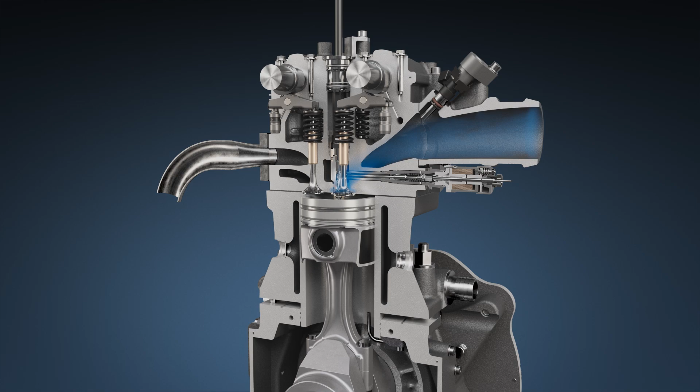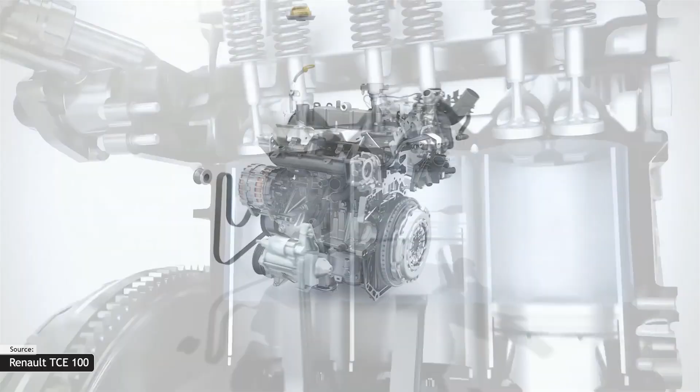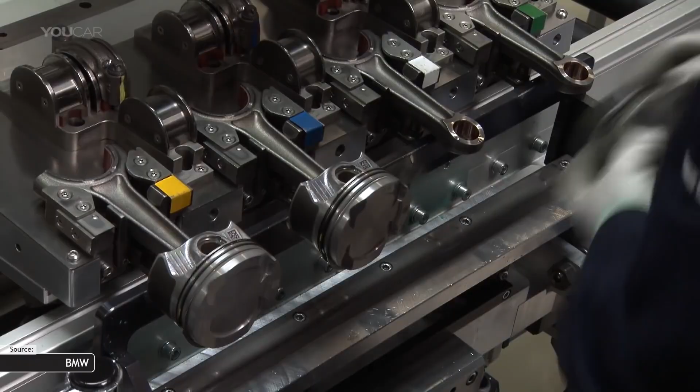In 2024, 87% of new cars sold in the world still had an internal combustion engine. Combustion engines are highly profitable to the automobile industry. They are affordable and low constraining to end users. Their production does not need critical materials.

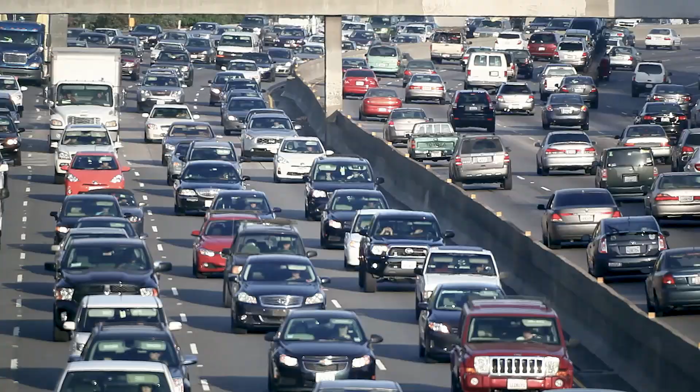As global warming demands solutions that are applicable at a global level, fuel-efficient combustion engines have a major role to play in the future. Not only will they reduce oil consumption on a large scale, they will also make synthetic fuels more competitive.

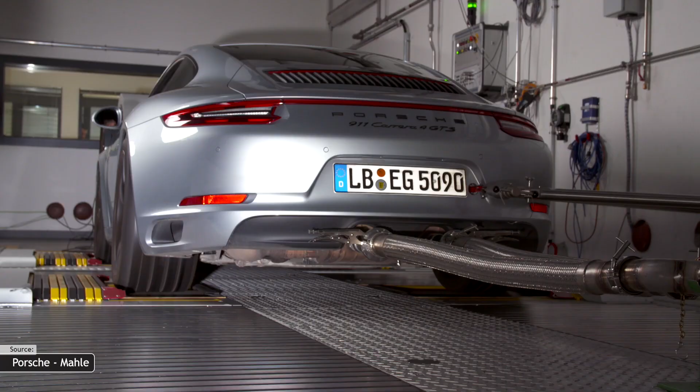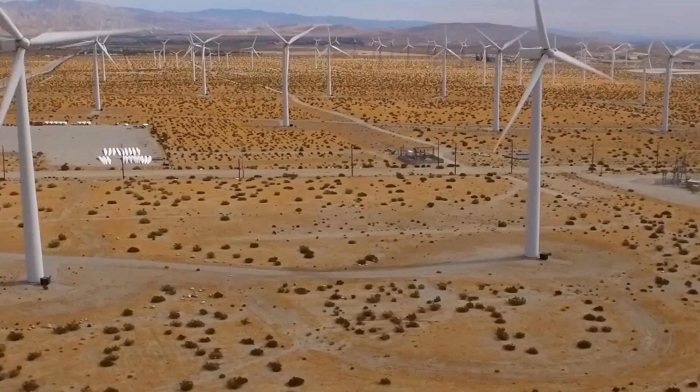Synthetic fuels can be combined with atmospheric carbon capture to create carbon-neutral, stable and long-life storage for intermittent renewable energy. They also have the benefit that they can be produced in regions where wind and sun are abundant.

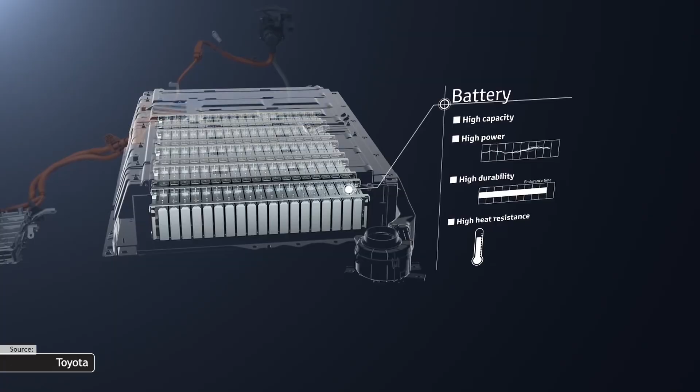Synthetic fuels and green electricity are both intended to power future plug-in hybrid cars. This carbon-neutral strategy will meet all customers' needs with limited constraints, minimum new charging infrastructures, and low dependence on critical raw materials. Combined with batteries, synthetic fuels could be used alongside fossil fuels and then completely replace oil by 2050.

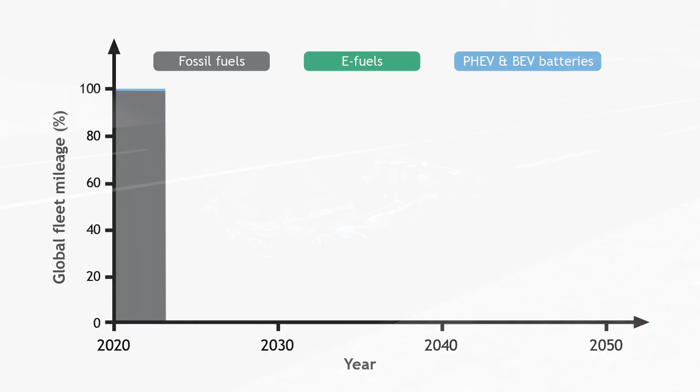This strategy could make passenger cars carbon neutral in just 2 or 3 decades while properly managing the economic, strategic, and social consequences of the energy transition.

In this context, turbulent jet ignition could play a major role. Turbulent jet ignition, also known as TJI, can significantly improve the fuel efficiency of combustion engines at a very affordable cost.

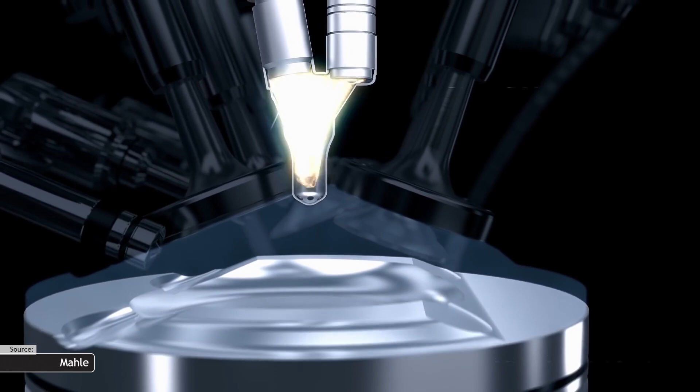Numerous R&D projects have demonstrated that TJI can potentially reduce the fuel consumption of gasoline passenger cars by 15 to 25%. Such an improvement would be a big step forward.

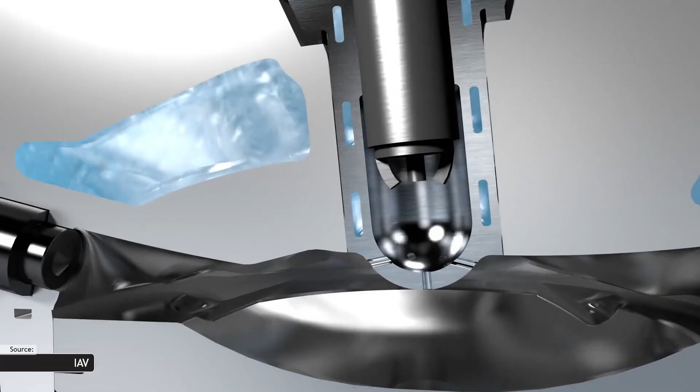Reducing the fuel consumption of all new petrol cars sold in France by 20% would reduce CO2 emissions by as much as if 28% of new cars sold were fully electric. In Germany, this would be equivalent to selling 55% electric cars.

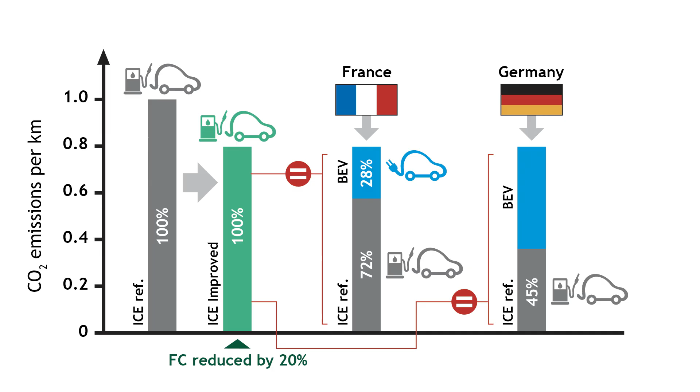However, up to now, turbulent jet ignition has been applied only to big-bore natural gas engines operating steady-state and to Formula One. TJI provides these applications with a brake thermal efficiency of more than 50%. Why not apply the same strategy to passenger cars?

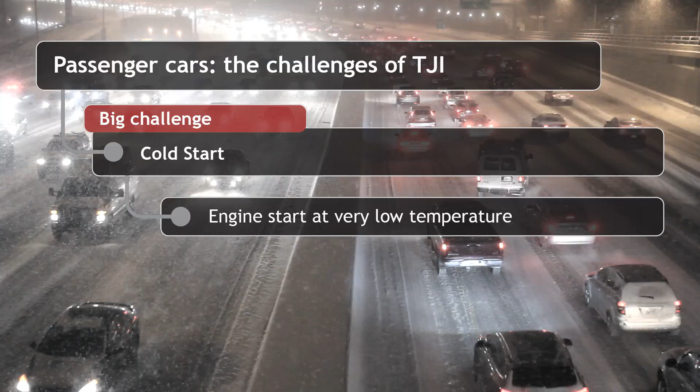Because existing TJI systems do not provide all the features needed for this application. For instance, turbulent jet ignition makes it difficult to guarantee a quick start at very low temperatures, a rapid warm-up of the engine, and a quick catalyst light-off.

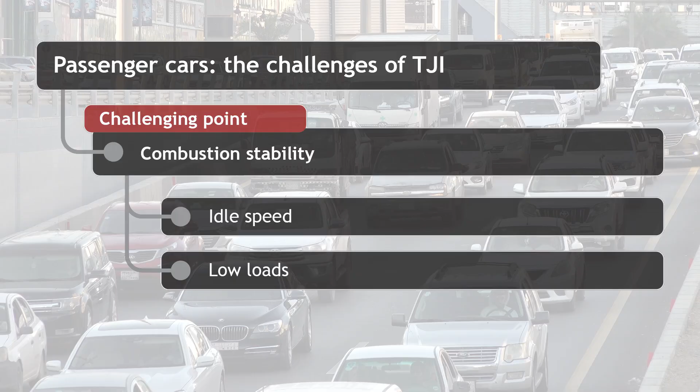TJI also poses problems of combustion stability at idle speed and low loads, and emits excessive noise and vibrations over a large engine operating range.

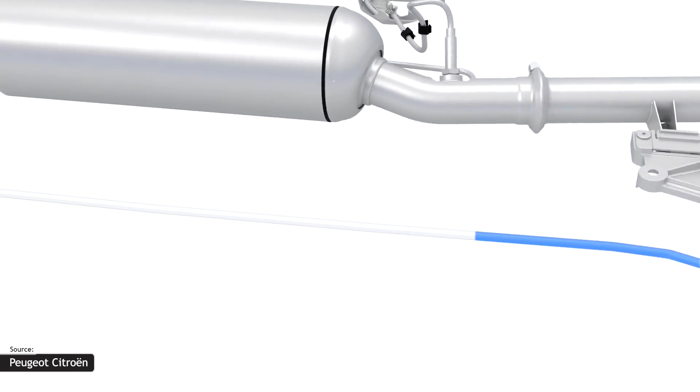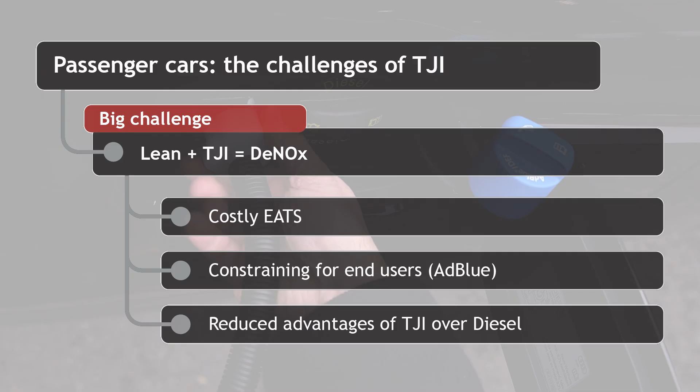Last but not least, most TJI technologies are lean burn oriented. Lean burn helps to achieve high efficiency, but calls for costly and constraining DeNOx after-treatment systems. This negates the advantages of TJI over diesel, particularly in the very cost-sensitive and demanding context of passenger cars.

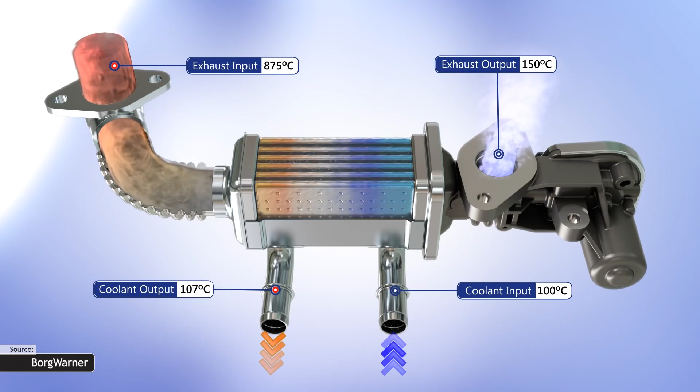As an alternative, turbulent jet ignition is to be combined with stoichiometric cooled EGR. This permits using an affordable three-way catalyst to comply with emission regulations. But cooled EGR makes implementation of TJI much more challenging, in most cases nearly impossible.

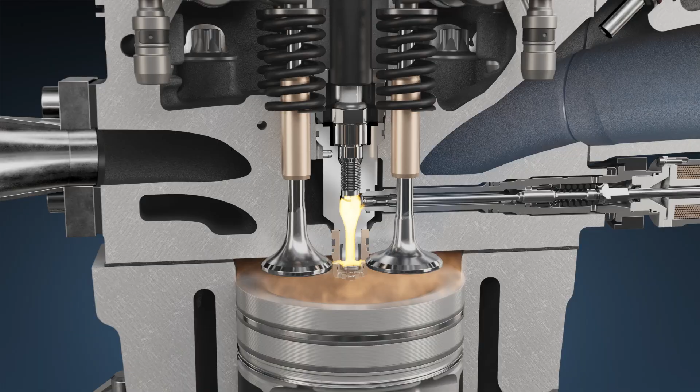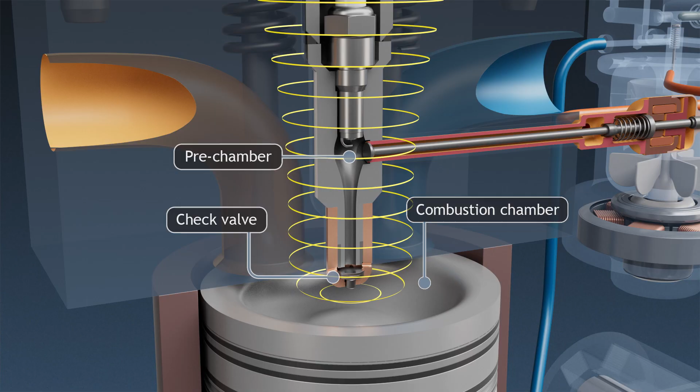In this context, the Valvijet technology drastically changes the game and provides all features that are indispensable to mass-market TJI passenger cars. In Valvijet, the pre-chamber is separated from the combustion chamber by a check valve, which is returned to its seat by a constant magnetic field.

When the check valve opens, it forms a jet emission chamber that is connected to the combustion chamber by jet emission holes. A damping chamber protects the check valve against excessive shocks when opening.

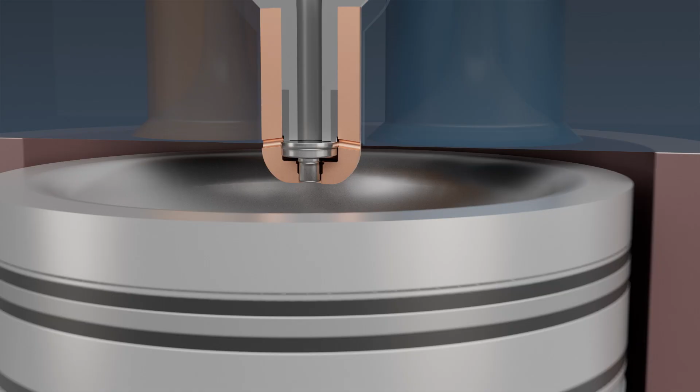Valvijet includes a small electric compressor, which supplies a Valvijet air fuel mixer that is no bigger than a can of soda with air under a 40 bars pressure.

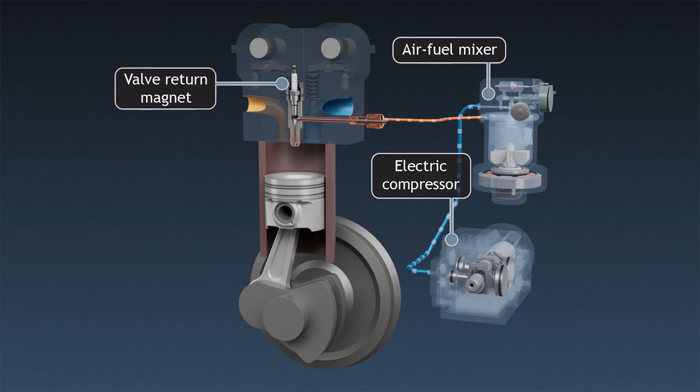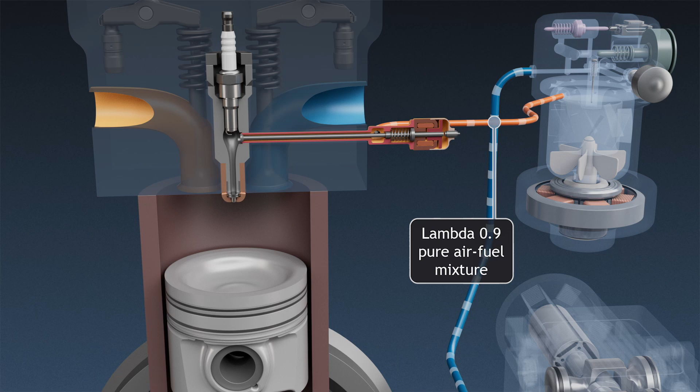The Valvijet mixer prepares a rich, homogeneous and fast-burning air-fuel mixture which is introduced in the vapor state into the Valvijet pre-chamber by a high-flow injector during the compression stroke of the engine. This small amount of air-fuel mixture constitutes the pilot charge.

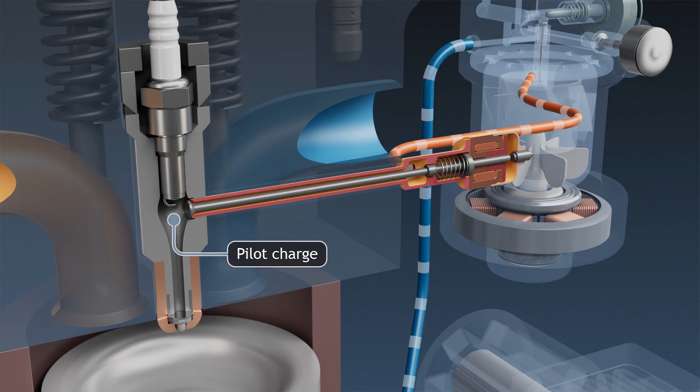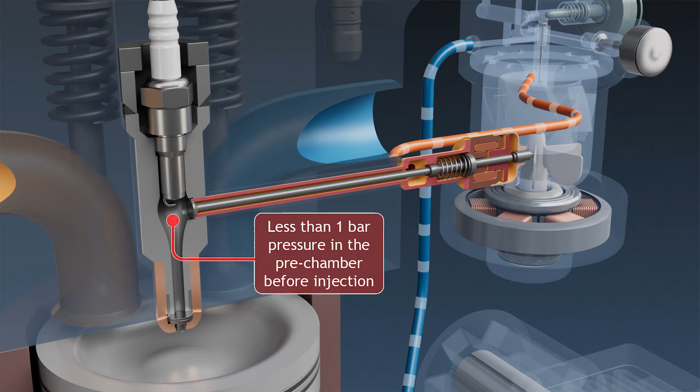As the Valvijet check valve separates the pre-chamber from the combustion chamber, the 40 bars pressure in the air-fuel circuit is high enough to properly feed the pre-chamber with the injector and low enough to prevent recondensation of the air-fuel mixture.

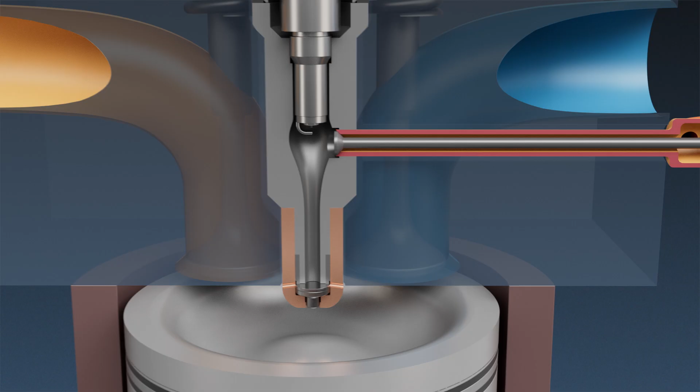The objective of the pilot charge in the pre-chamber is to deliver the most efficient ignition possible, while the main charge in the combustion chamber is intended to maximize engine thermal efficiency. To achieve these objectives, the air-fuel ratio, pressure and temperature of the pilot charge are drastically different from those of the main charge. That's why Valvijet prevents the main charge from mixing with the pilot charge.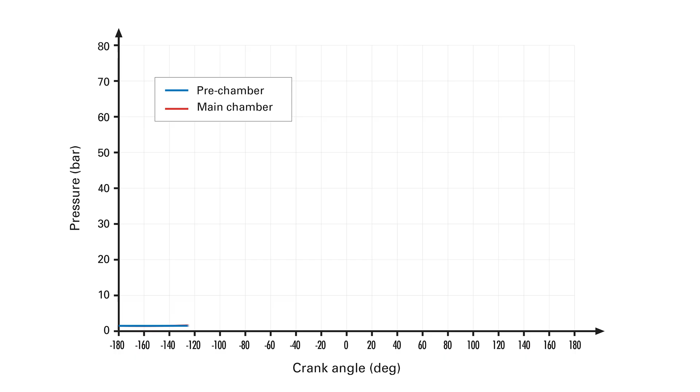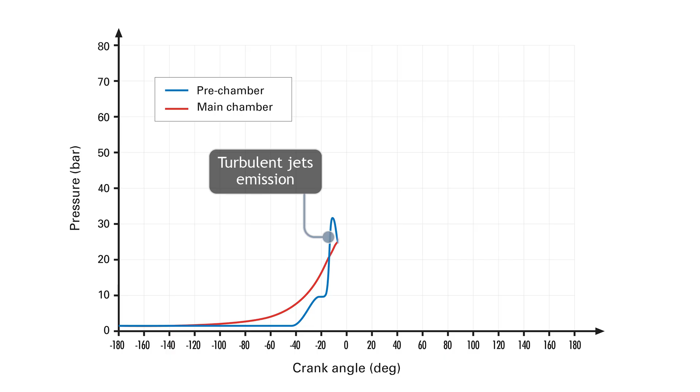With the Valvijet check valve, the combustion of the pilot charge starts in the pre-chamber at constant volume with no effect on the main charge. When the pressure in the pre-chamber surpasses that in the combustion chamber, strong turbulent jets are emitted in a very short time. This forces the main charge to burn very quickly in the combustion chamber, which prevents knock from occurring.

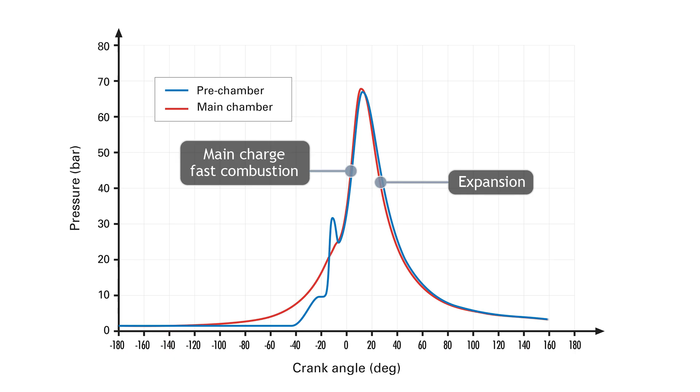Because the Valvijet check valve separates the pre-chamber from the combustion chamber, the mass of the pilot charge is set independently from that of the main charge. This makes it possible to fine-tune the ignition power of turbulent jets.

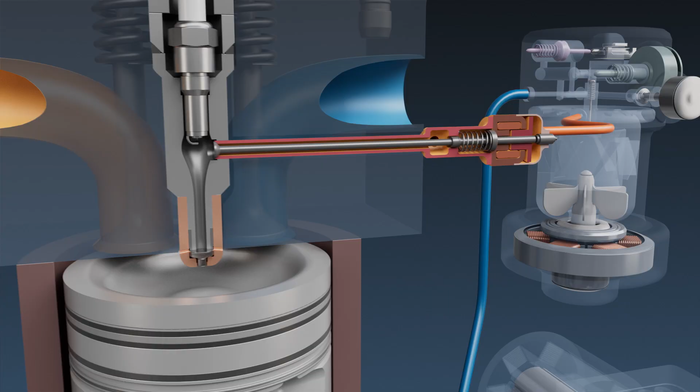If the main charge is highly diluted with EGR, a big pilot charge is introduced in the pre-chamber. This produces high ignition power and fast turbulent jets. If, on the other hand, the main charge is free of dilution and very reactive, a small pilot charge is introduced in the pre-chamber. This is finely tuned to get the best compromise between thermal efficiency and noise emissions.

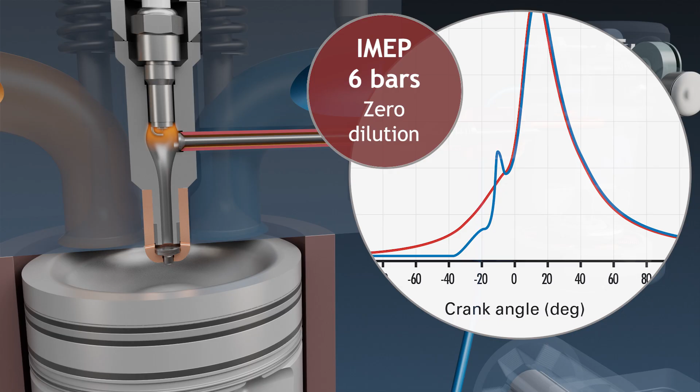Thanks to its innovative check valve and its pilot charge injector, Valvijet delivers ignition power on demand under very precise timing. This leads to ultra-small coefficients of variation in IMEP, most of the time below 1%, no matter the engine load and speed, even at lambda 2.5.

As Valvijet is a fully autonomous turbulent jet ignition system, it can efficiently ignite any main charge, whether it is diluted with air or cooled, recirculated exhaust gases.

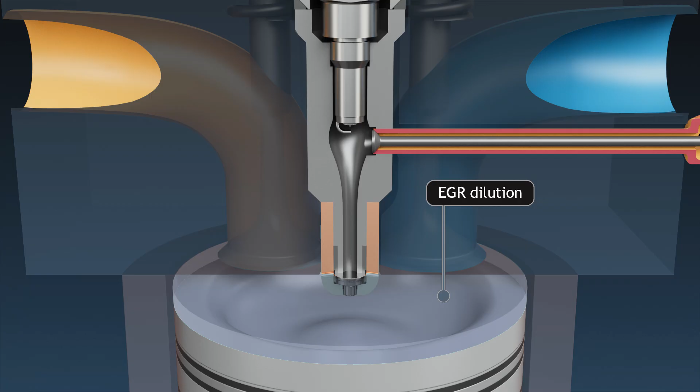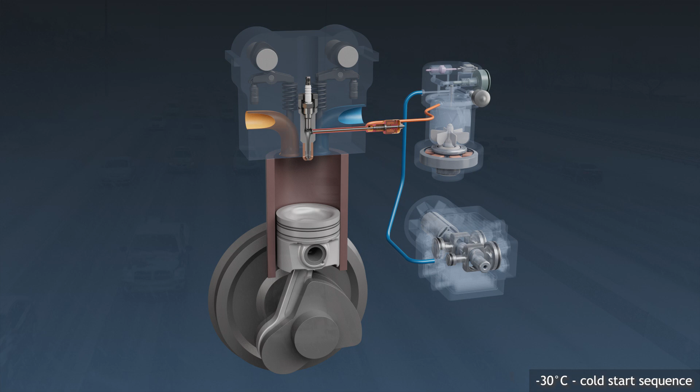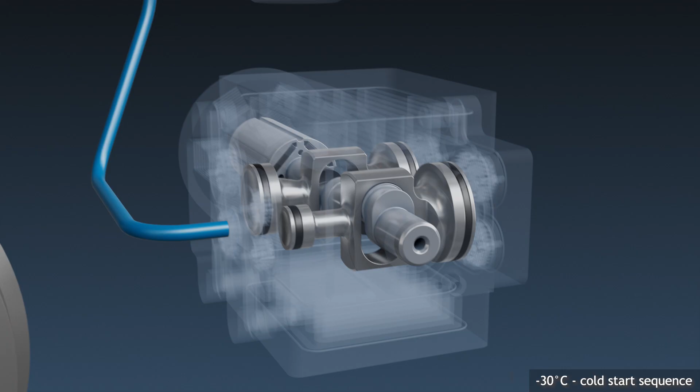With Valvijet, starting an engine at very low temperature no longer poses a problem to TJI. For instance, when cold starting the engine at -30 degrees Celsius, as soon as the ignition is turned on, the electric compressor raises the pressure in the air-fuel mixer up to 5 bars in less than 1 second.

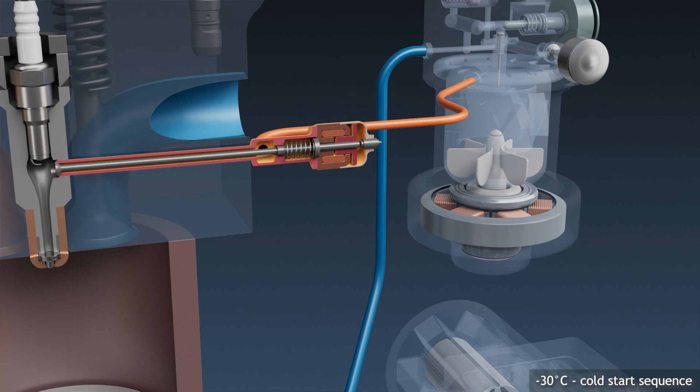5 bars is the limit for partial recondensation of a lambda 1 air-fuel mixture at -30 degrees Celsius. At this stage, limiting the pressure at 5 bars prevents the fuel mixture from partially recondensing in the Valvijet pilot charge circuit.

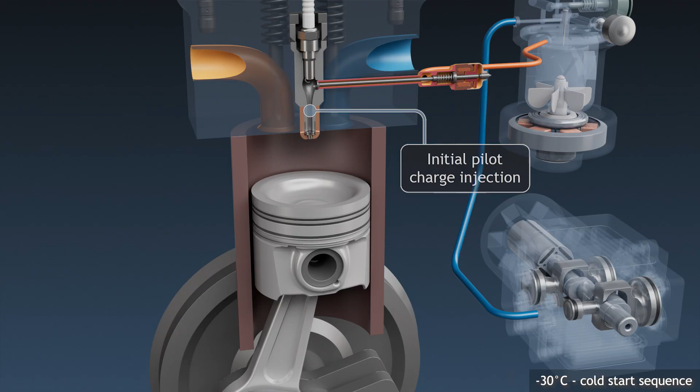While the piston compresses the main charge in the engine combustion chamber, the Valvijet injector opens and fills the pre-chamber with homogeneous and fully gaseous lambda 1 air-fuel mixture under a 5 bars pressure.

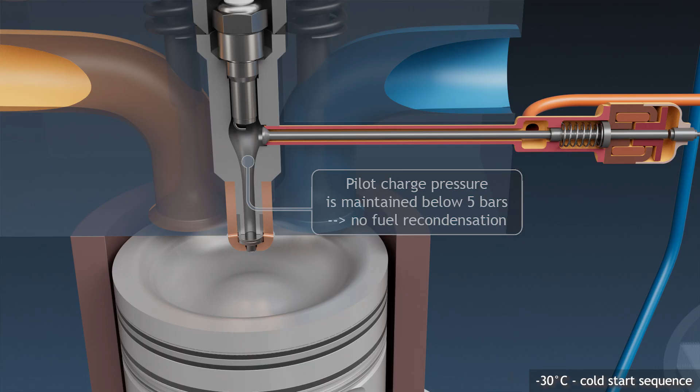Meanwhile, the pressure in the main chamber surpasses 5 bars. This has no consequence on the pressure in the pre-chamber, which stays below 5 bars. At this pressure, despite the very low temperature of the engine, the pilot charge in the pre-chamber does not recondensate, even partially. It remains entirely gaseous and easily flammable.

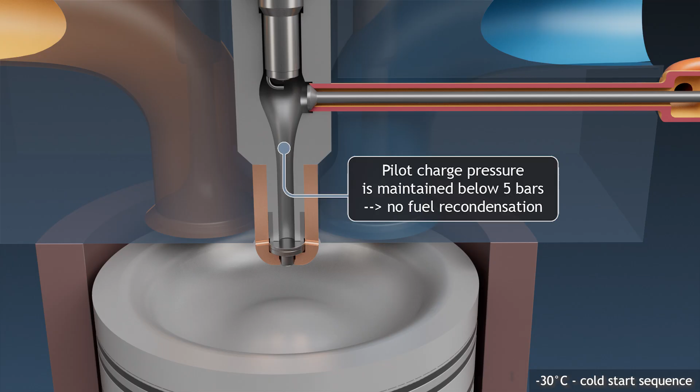At the appropriate time, the pilot charge is ignited in the pre-chamber. As a result, turbulent jets are emitted into the main chamber, which deliver ignition power hundreds of times greater than that of a conventional spark plug. The engine starts immediately, despite its very low temperature.

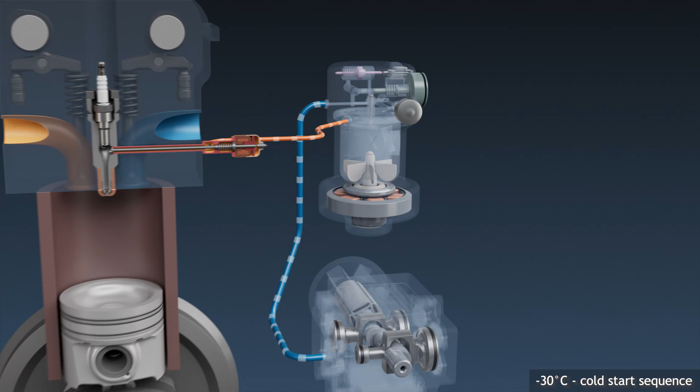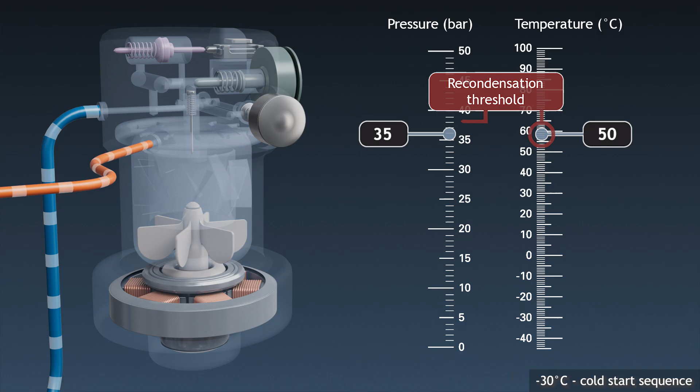As the engine temperature rises up, the pressure in the Valvijet air-fuel mixer also increases while staying always below the air-fuel mixture recondensation limit. The pressure in the air-fuel mixer reaches 35 bars when the engine temperature attains 50 degrees Celsius. With Valvijet, rapid engine warm-up and catalyst light-off is also no longer a problem to TJI.

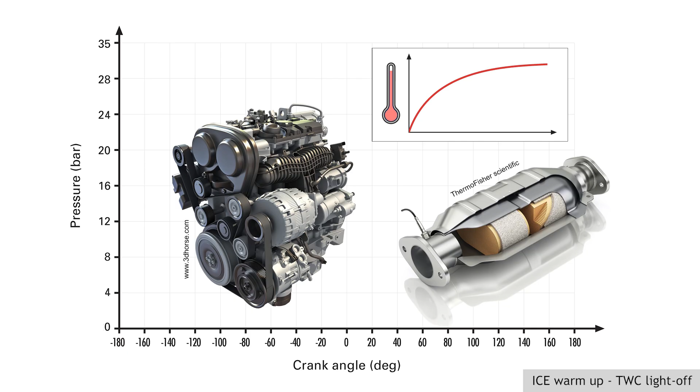Valvijet permits to significantly retard the combustion of the main charge so as to reduce the engine thermodynamic efficiency and increase exhaust gases' enthalpy.

At the start of the engine's compression stroke, the Valvijet check valve being closed, a pre-injection cleans the pre-chamber of any residual burnt gases. The pre-chamber forms a closed space where the composition, pressure and temperature of the pilot charge guarantee its optimum flammability.

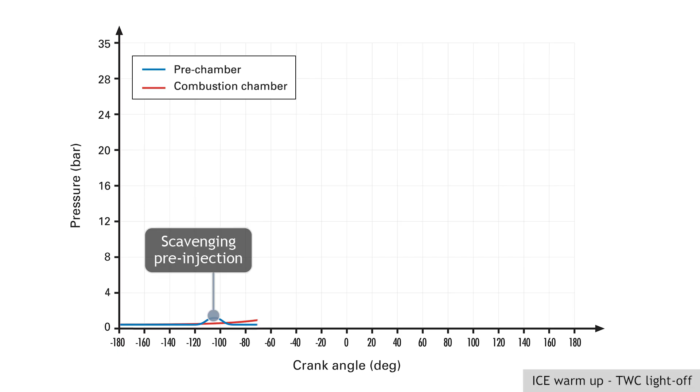Then, the main charge in the combustion chamber is compressed by the piston up to the top dead center. Beyond this point, the main charge starts expanding without having been ignited, while the pilot charge is introduced in the pre-chamber.

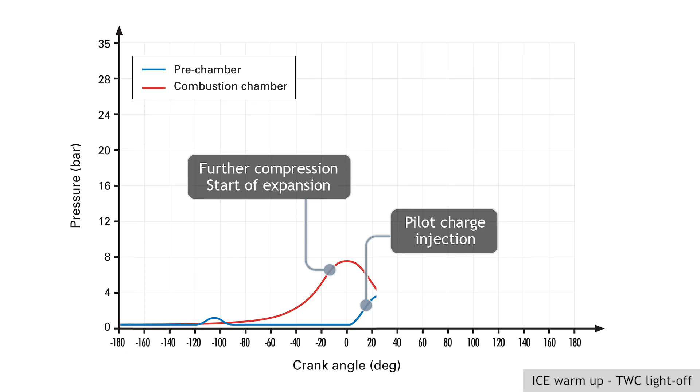Thanks to the Valvijet check valve, the pilot charge is not affected by the expansion and cooling of the main charge. The low pressure in the pre-chamber prevents the pilot charge from recondensing despite the low engine temperature. Late after the top dead center, since the Valvijet check valve is kept closed by the pressure in the combustion chamber, the pilot charge is ignited in the pre-chamber.

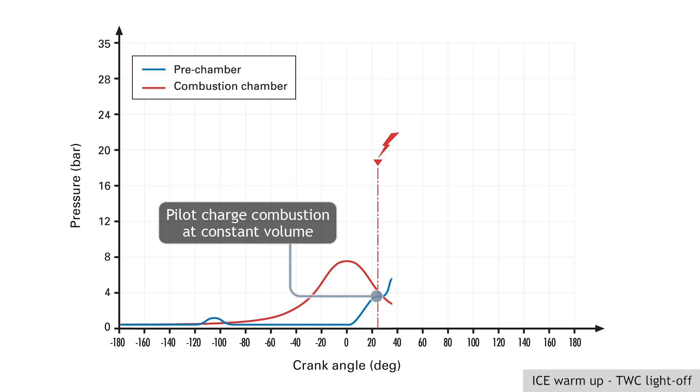The combustion of the pilot charge develops in the pre-chamber at constant volume without risk of flame quenching because of the expansion of the gases in the combustion chamber. When the turbulent jets are finally emitted in the combustion chamber, they deliver a high ignition power and strong local turbulence.

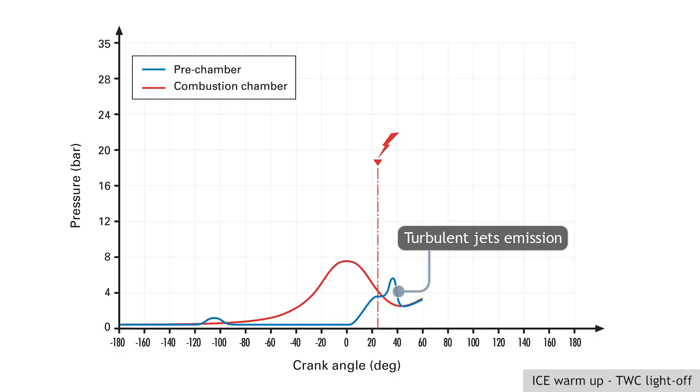This provides the engine with high stability despite the delayed combustion of the main charge and produces minimum unburnt hydrocarbons. Retarded combustion can also reduce turbo lag.

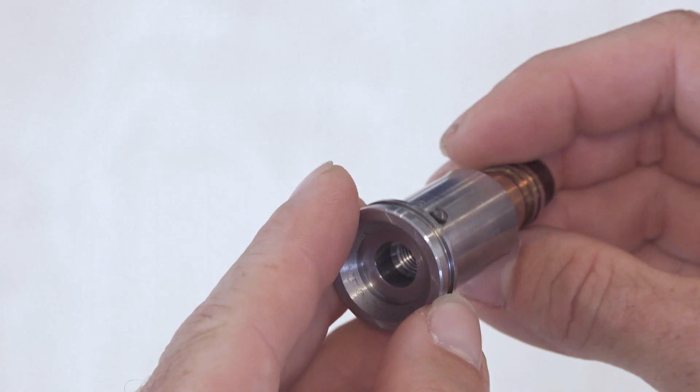From the technology standpoint, Valvijet can integrate in any existing diesel or gasoline engine architecture. It is made of simple parts that are easy to mass produce. The Valvijet pre-chamber is fitted inside an insert made of magnetic stainless steel. The insert is mounted in the cylinder head in place of a vertical injector or a spark plug.

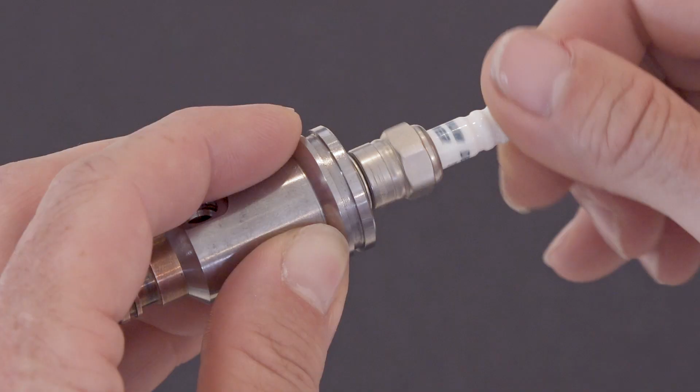A spark plug is screwed in the insert, and the pilot charge injector is positioned horizontally in the engine. The Valvijet injector has a radial gas intake port connected to a gas duct made inside the cylinder head. This permits keeping the air-fuel mixture at engine temperature. The injector is actuated by a solenoid.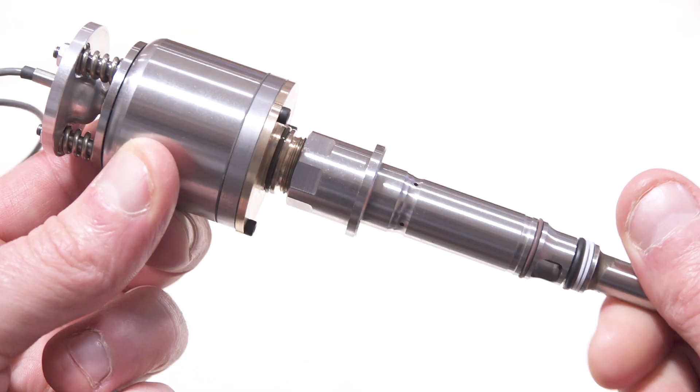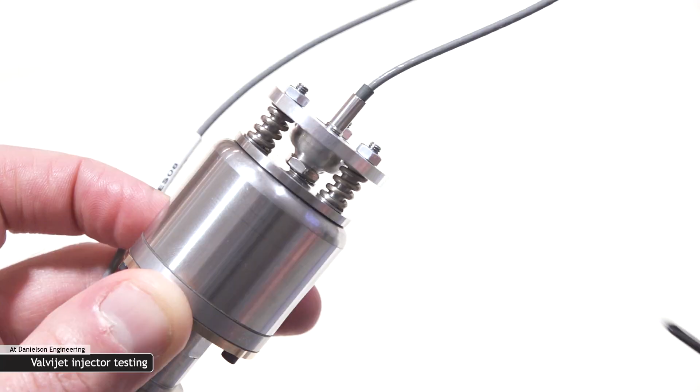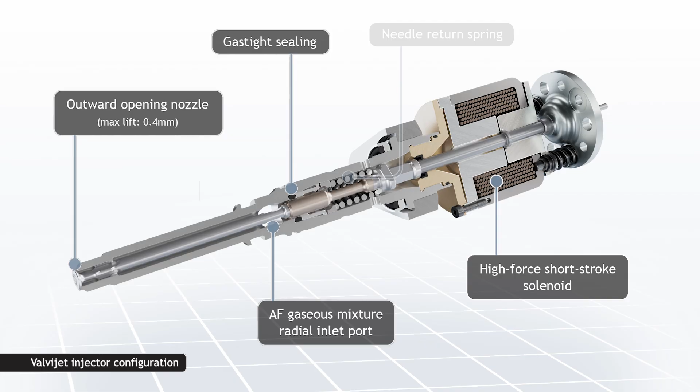Because of the very small amount of mixture to be delivered in a very short time, a position sensor guarantees a precise needle lift control and pilot charge flow metering. The Valvijet injector offers an infinite number of needle lift variations, for example in plateau, ballistic, or in any form whatsoever.

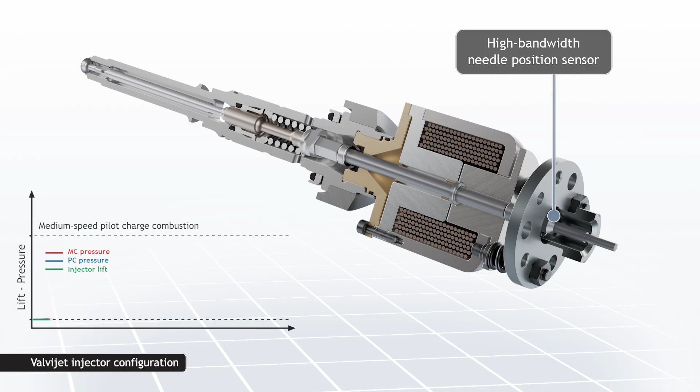For instance, a prior scavenging opening eliminates residual burnt gases from the previous cycle, while the phasing of the main lift determines the turbulent energy when sparking and the pilot charge heat release. These strategies are decisive for obtaining the most efficient possible ignition of the pre-chamber in all cases.

The Valvijet injector operates up to 7,000 RPM and even beyond. It is reliable, robust, durable, and its long and thin nozzle is inserted in between the intake ports of the engine.

The Valvijet check valve weighs less than 1 gram. It is made of hard-coated magnetic tempered steel and can move in an abrasion-resistant friction insert mounted in the copper nozzle. The seat of the check valve is made of hard-coated tempered steel.

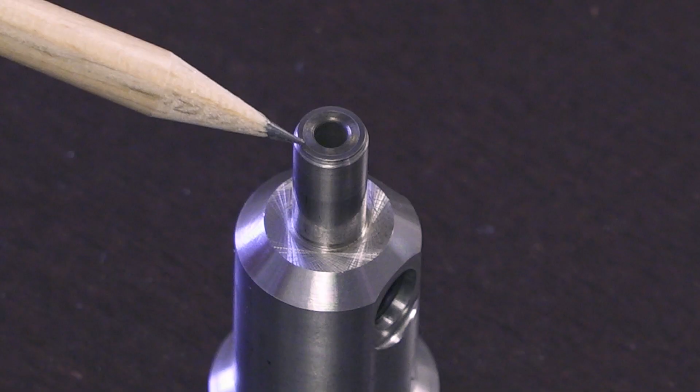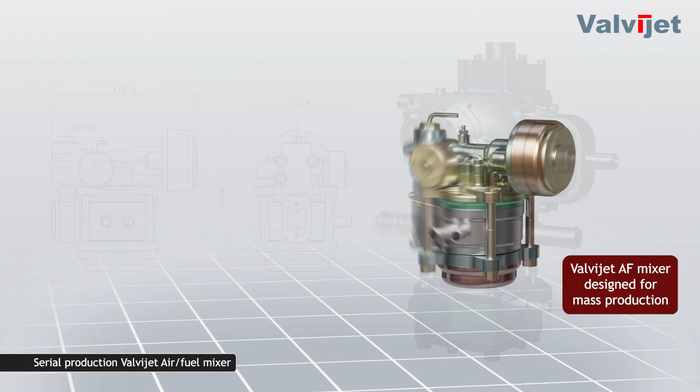Every Valvijet subcomponent has been developed on dedicated test beds. Once their operation has been validated on test engines over the entire operational range, they are optimized in size, weight, and cost for mass production.

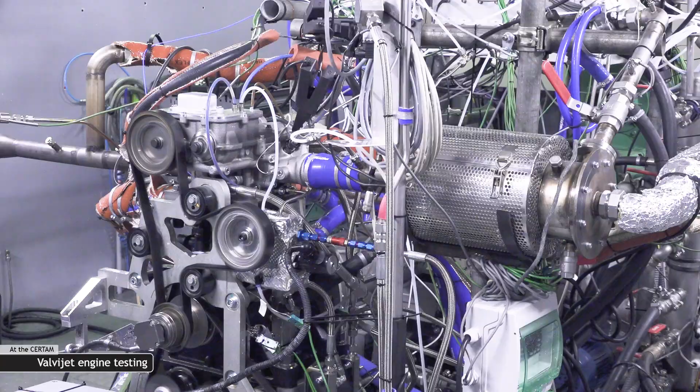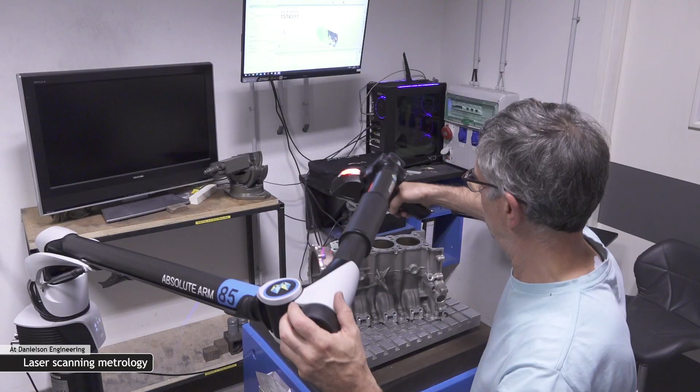Valvijet has been tested on single-cylinder engines and on a rapid compression machine. Valvijet is developed mainly by Danielson Engineering and the CERTAM, two companies with great expertise in engines development. Danielson Engineering can adapt Valvijet to any existing engine in only a few months. In the end, Valvijet is a short time to market add-on technology.

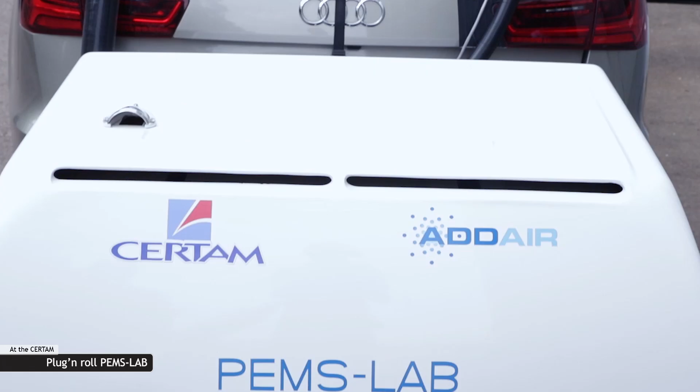In a regulatory context that is very restrictive for the automotive industry, Valvijet can significantly reduce CO2 and pollutant emissions from combustion cars in the core market in return for a limited cost and investment.